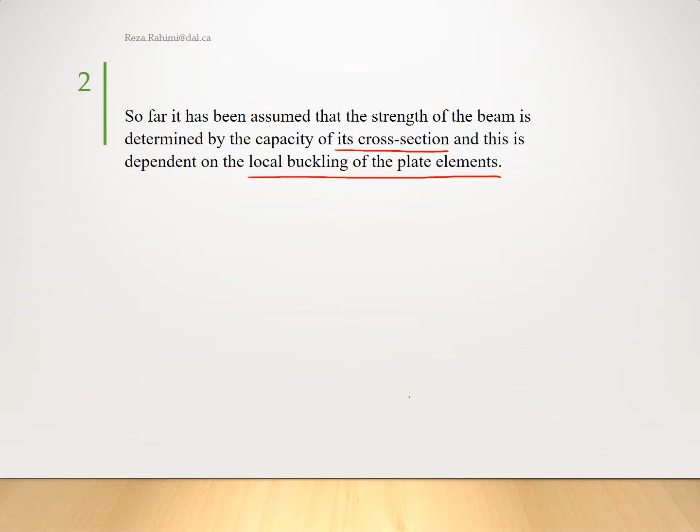Okay, lateral torsional buckling. If a beam is not laterally supported, then the strength of that may be governed by lateral torsional buckling. It is twisting and bending about the weak axis, and we're going to talk about this more. This would cause failure at applied moment significantly less than full cross-sectional strength. So definitely our moment will be lower than plastic moment. And it will happen for the laterally unbraced members, where L is bigger than the unbraced length.

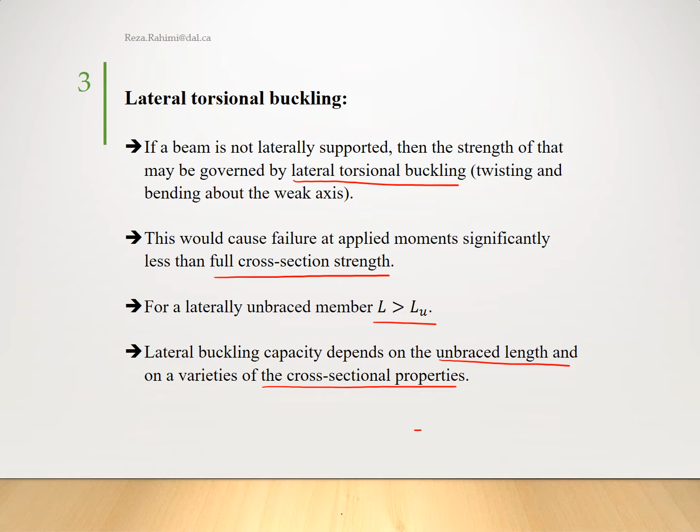Lateral buckling capacity depends on the unbraced length and a variety of cross-section properties. Lateral buckling of a beam is analogous to flexural buckling in a column, as both represent ideal situations. As columns are not perfectly straight, beams contain imperfections, so lateral deflection will be there even before loading. Like columns, unbraced beams can be classified into three categories: stocky, intermediate, and slender members, based on their failure mode and the slenderness ratio.

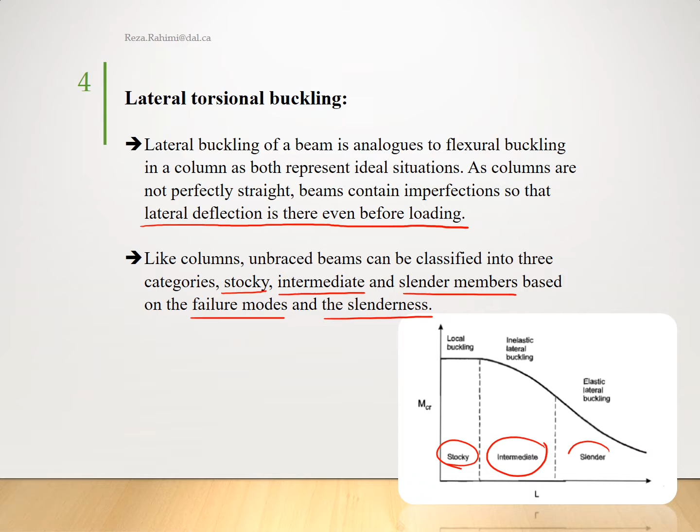When a beam is subjected to bending moment, the cross-section moves vertically from its initial position, as you can see in this picture. At some stage of loading, the cross-section may twist and bend about its weak axis. Therefore, lateral torsional buckling has occurred. So, both bending and twist about its weak axis. It can happen at any stage of the loading: after the member reaches plastic moment for class 1 and 2, between My and Mp for class 3, and lower than yielding moment for class 4.

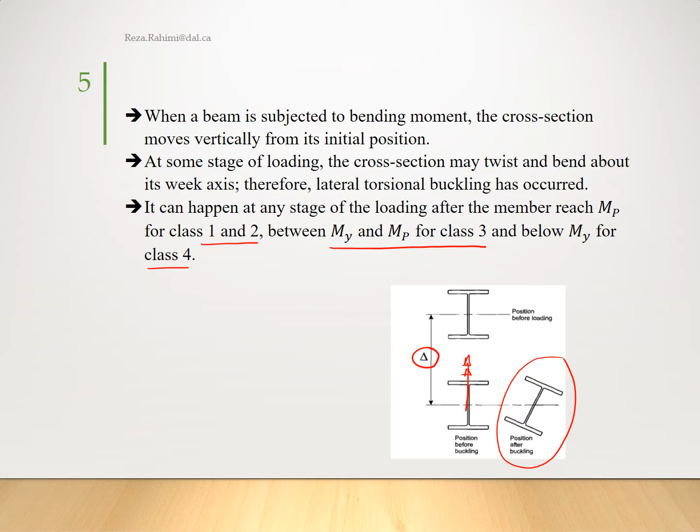A stocky beam is defined as a beam that is able to reach its local buckling capacity before lateral buckling. So before it reaches Mp for class 1 and 2, My for class 3, and My for class 4, the local buckling will happen in stocky members. But an intermediate member, which has an inelastic lateral buckling, has a bending moment at the instant before lateral buckling that is sufficient to cause a portion of the member to yield. So that will reduce the resistance of the member to both lateral and twisting motions.

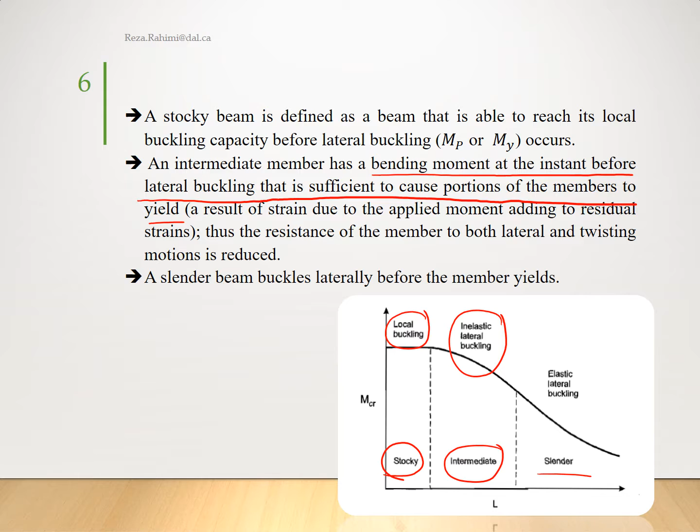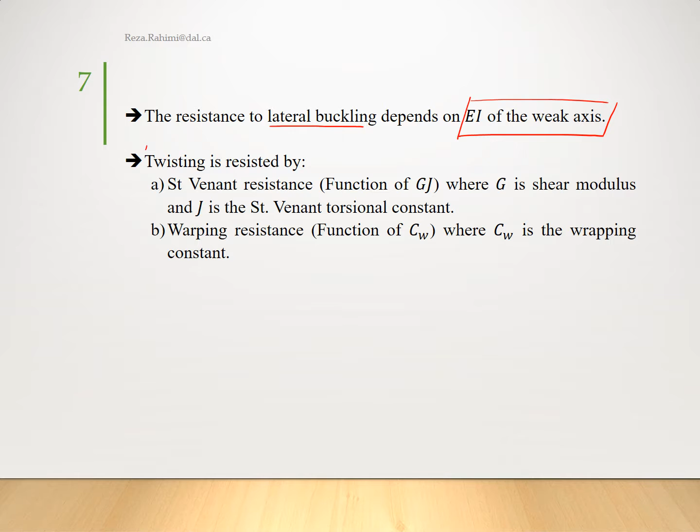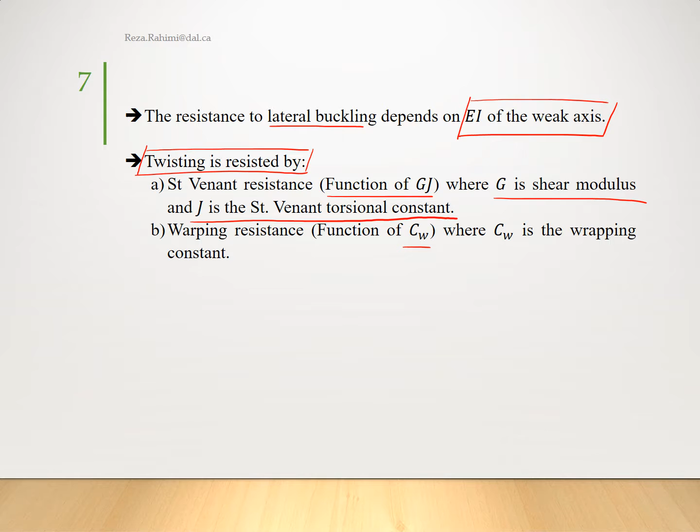What is a slender member? A slender beam buckles laterally before reaching the yielding moment. So it buckles elastically. Okay, the resistance to lateral buckling depends on EI of the weak axis, and twisting will be resisted by Saint Venant resistance, which is a function of GJ. G is shear modulus and J is Saint Venant torsional constant, and warping resistance Cw, where Cw is the warping constant.

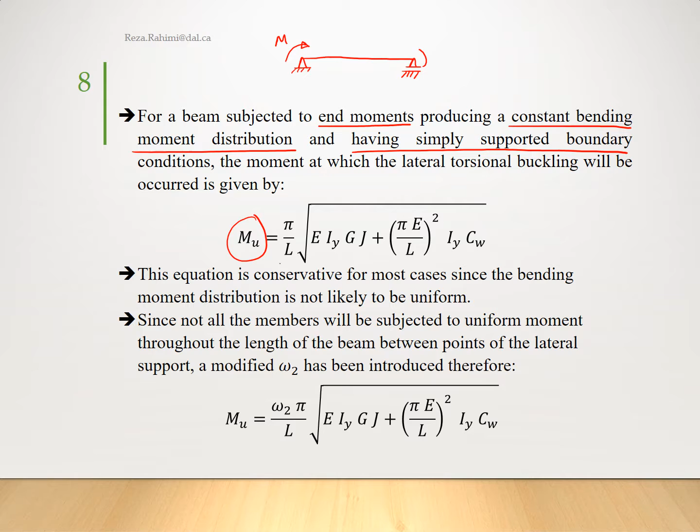For a beam subjected to end moments producing a constant bending moment distribution and having simply supported boundary conditions, the moment at which lateral torsional buckling will occur is given by this formula. So this is for a simply supported beam subjected to end moments. This is the free body diagram, this is the bending moment diagram, so this formula is for this situation. Therefore, this formula is conservative for most cases, since bending distribution is not likely to be uniform in all cases.

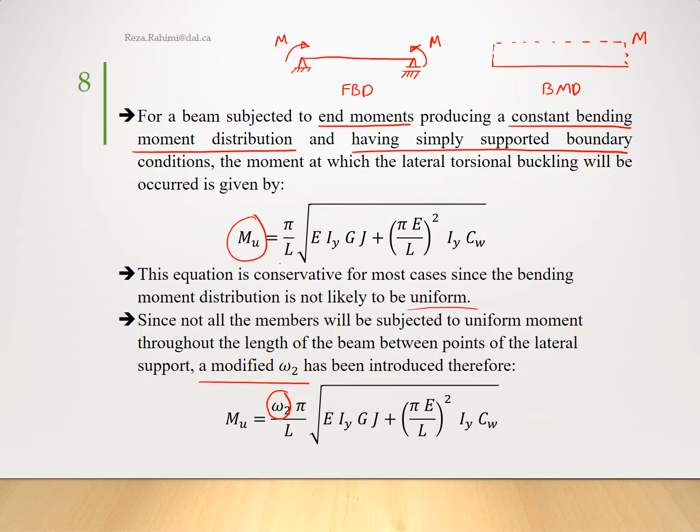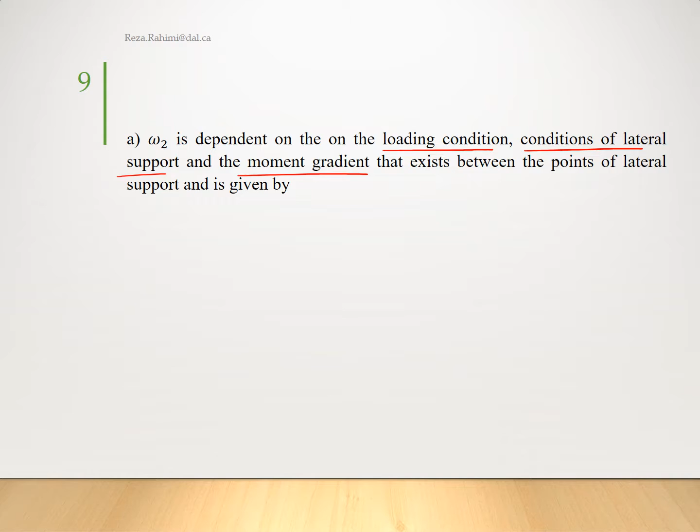Since not all members will be subjected to uniform moment throughout the length of the beam between the points of lateral support, a modification factor omega 2 has been introduced to modify this formula for the other conditions, because it is not likely that we have constant moment along the length of the beam. Omega 2 is dependent on the loading, condition of lateral support, and moment gradients between the points of lateral support, and is given by this formula. This formula is introduced for nonlinear bending moments, such as this one.

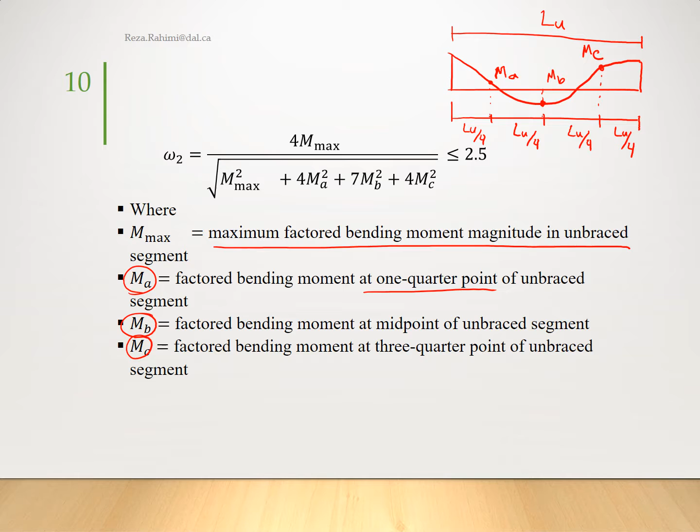For example, consider this is the laterally unsupported length of a beam. If we divide this length into 4 segments, each of them Lu over 4, by using this formula we can calculate omega 2, where Mmax is the maximum factored bending moment, Ma is the factored bending moment at the 1/4 point, Mb is in the middle, and Mc is at this point. Be careful that this formula works for a non-linear bending moment diagram.

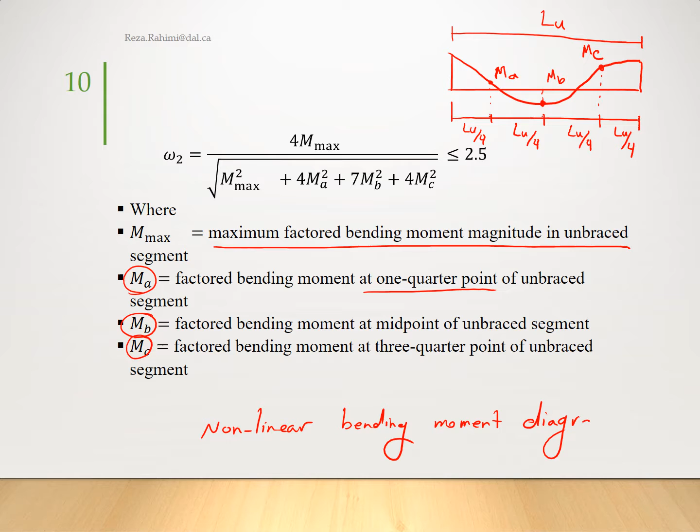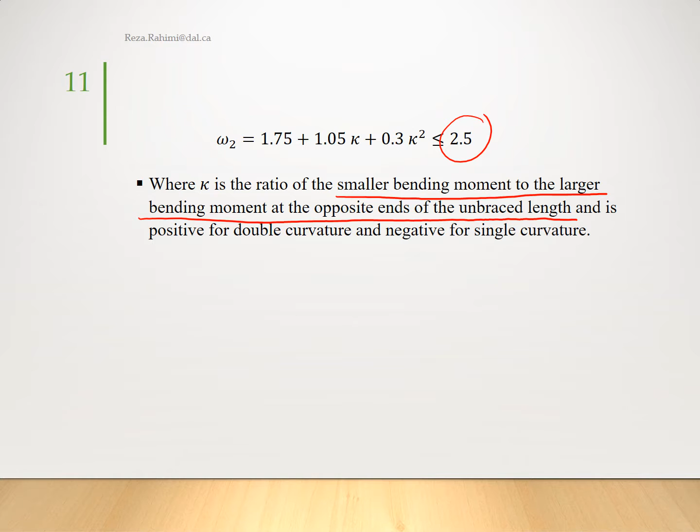The other formula for omega 2 is this formula you can see here. And be careful that the upper bound for omega 2 is 2.5. Kappa in this formula is the ratio of the smaller bending moment to the larger bending moment at the opposite end of the unbraced length. It is positive for double curvature and negative for single curvature. When the bending moment at any point within the unbraced length is larger than the end moment, omega 2 is 1. For example, a simply supported beam with a point load has omega 2 of 1, because the midspan moment is larger than the end moments, which are 0.